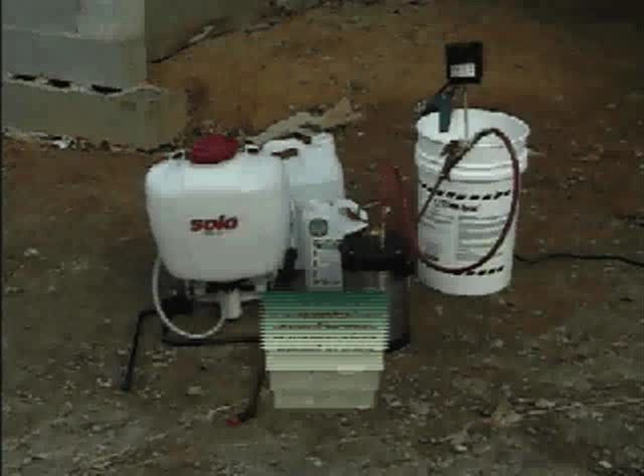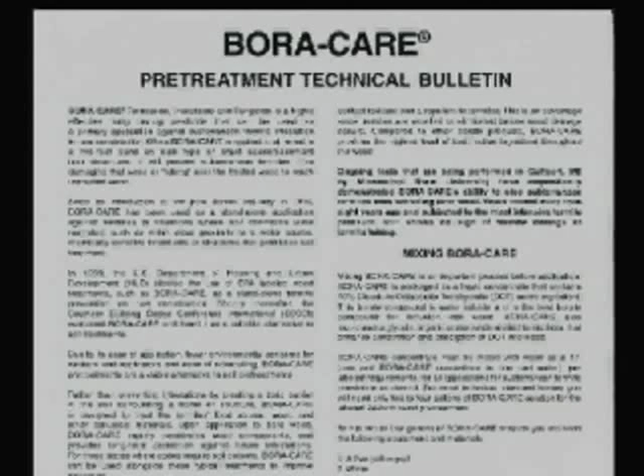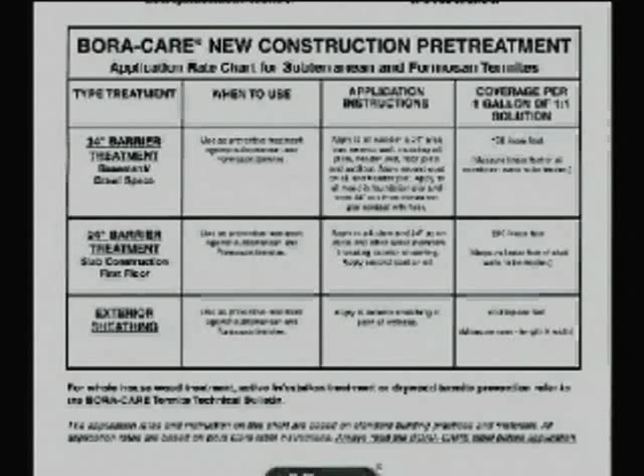To determine the amount of Bora Care needed to treat wood components in new construction treatments, check the chart found on the back page of the Bora Care Pre-Treat Bulletin. This handy chart gives a simple explanation of how much Bora Care is required for different application situations.

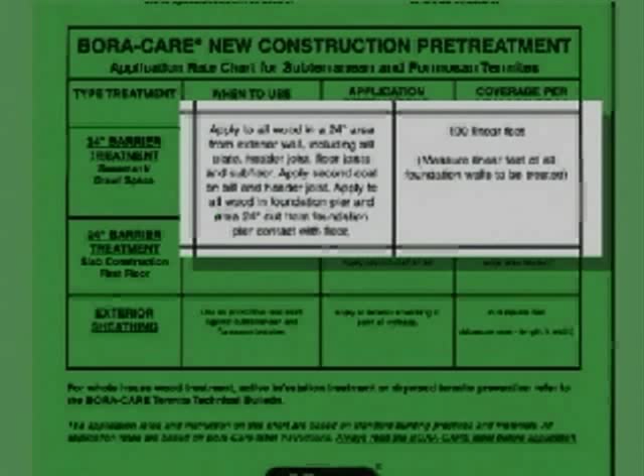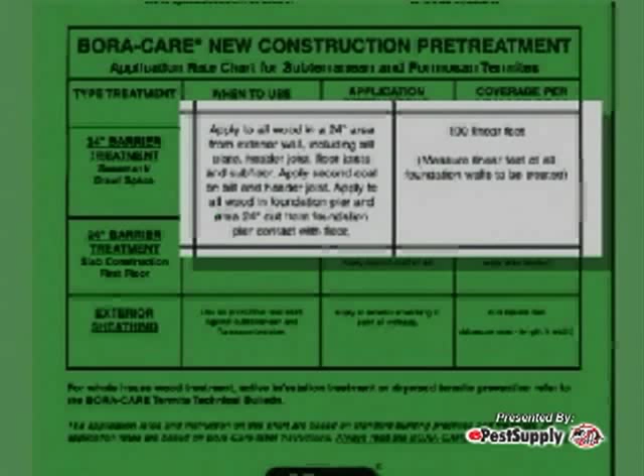For example, let's calculate the amount of Bora Care required to treat a 24-inch band treatment in a crawl space or basement home. From the chart, you will see that it requires 1 gallon of Bora Care solution to treat 100 linear feet. We will use this chart more extensively when we discuss specific treatments.

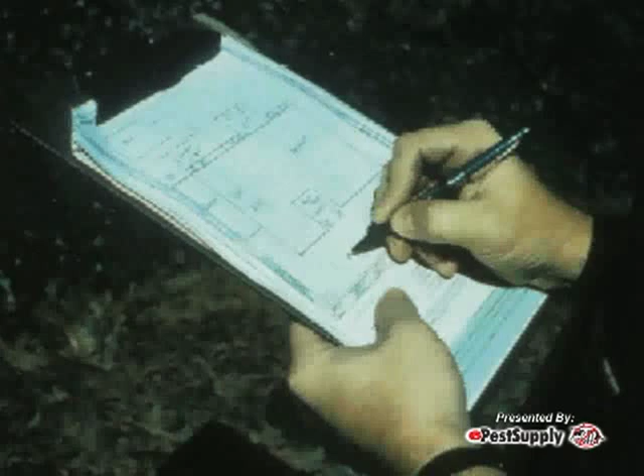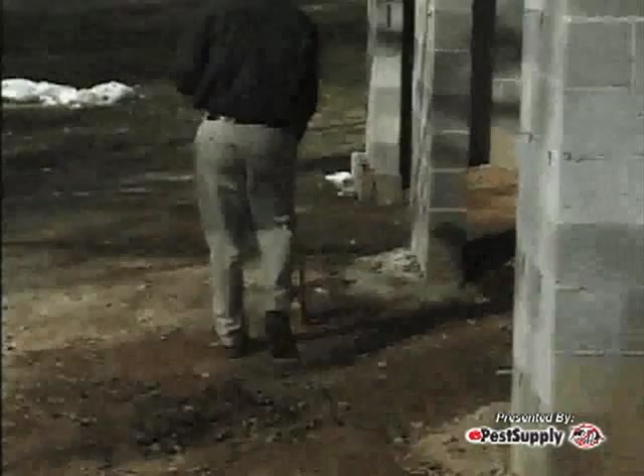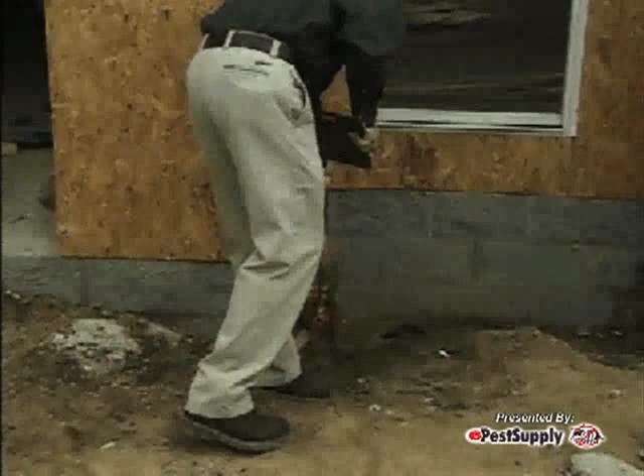After you know the structure is a slab or crawl space or basement, the next thing you must determine is the linear measurement of the structure. One accurate and fast method to accomplish this is to use a measuring wheel. This wheel can be used to measure the linear feet of outside foundations in all new structures and the linear feet of inside stud wall areas that are required to be treated in slab structures. We will talk more about measuring wheel use later in calculating specific applications on various foundation types.

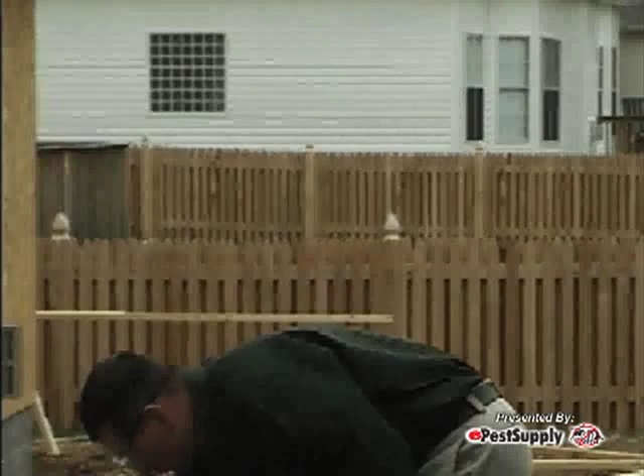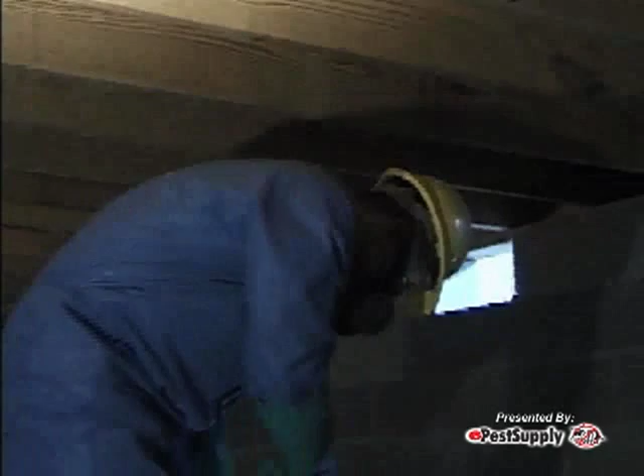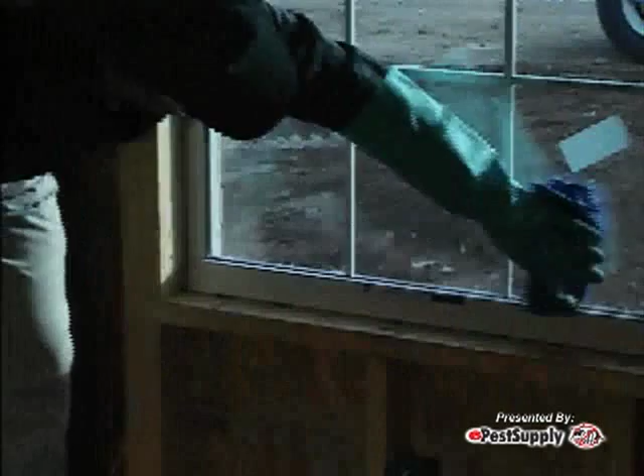Before beginning any chemical treatment, it is important to consider safety. According to the Bora Care label, the applicator must wear a long-sleeved shirt, long pants, socks, shoes, chemical-resistant gloves, and protective eyewear. When applying Bora Care in a confined area, it is recommended to wear an NIOSH-approved respirator when ventilation is not provided. Spills or overspray can be cleaned with a damp cloth or absorbed with appropriate materials.

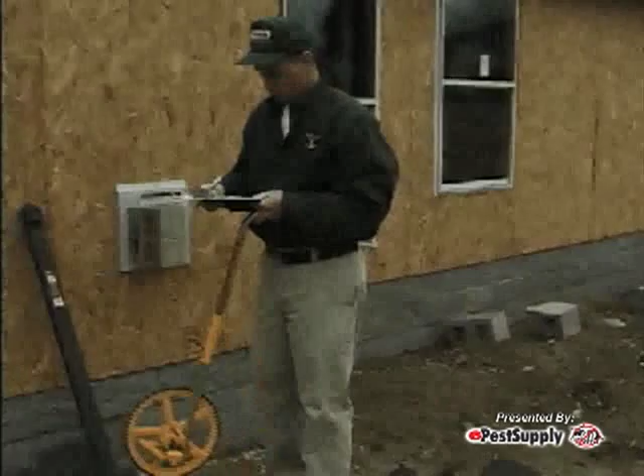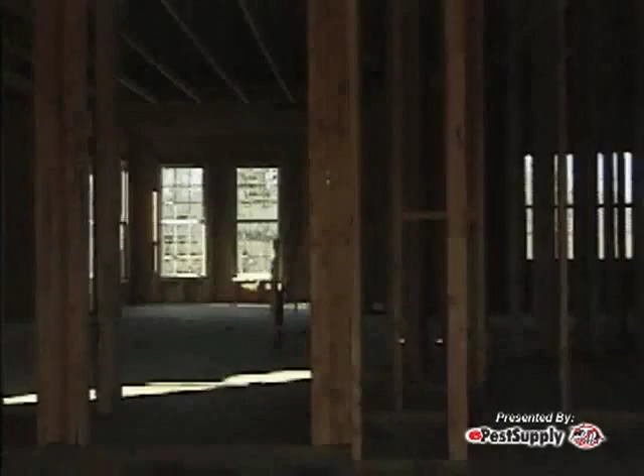Let's look at practical applications on new slab residential structures. The first step is to determine the amount of Bora Care needed. With a slab home, all wood components within 24 inches of the slab are treated. This includes the wall sill, wall studs, and exterior wood sheathing.

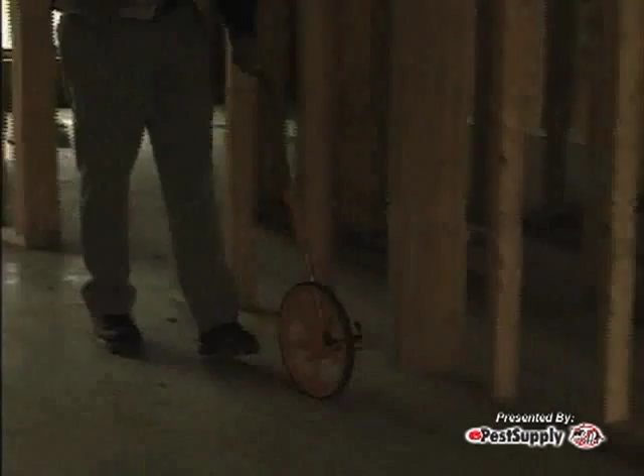First, measure the linear feet of stud walls and sill plates on the exterior walls and the interior walls of the structure. Once again, use the handy chart found on the back page of the Bora Care Pre-Treat Bulletin to figure the coverage for a slab home. The chart shows that when spraying to the point of wetness, 1 gallon of Bora Care solution will treat 200 linear feet at a 24-inch height on exterior and interior stud walls and sill plates.

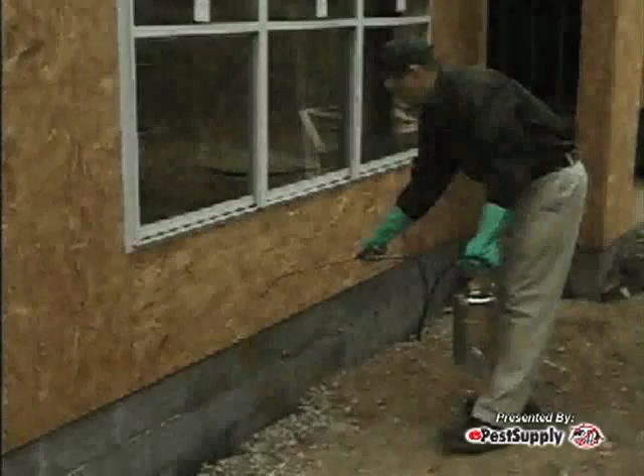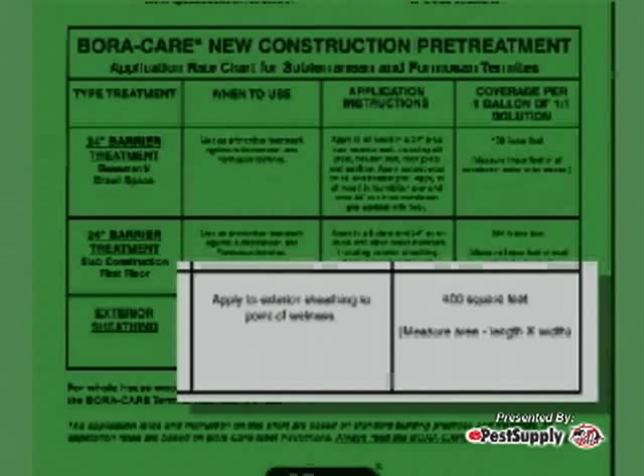If the home has exterior wood component sheathing, such as plywood or OSB board on the exterior, you will look at the chart area for exterior sheathing. To treat this area, spray to the point of wetness from the bottom of the sheathing up 24 inches on both sides. You will take the total linear footage of exterior sheathing and multiply by 2 feet or 24-inch treatment height to obtain the square footage of sheathing to be treated. This chart shows that 1 gallon of Bora Care will treat 400 square feet of exterior sheathing.

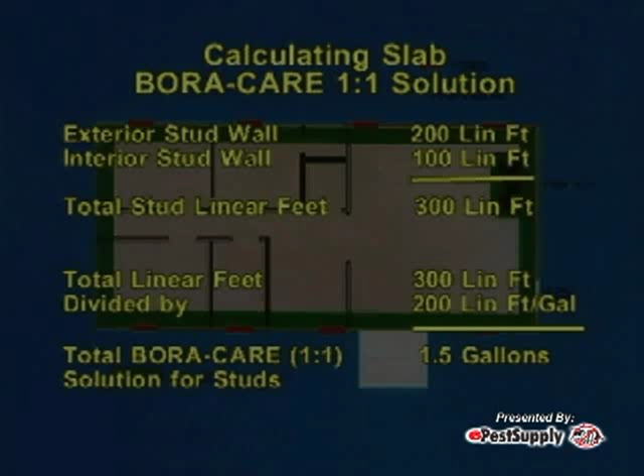For example, let's use a 2,500 square foot slab home. The linear footage on the exterior stud wall is 200 linear feet. The interior stud walls measure 100 linear feet. Using the application chart, you can determine the total Bora Care solution required to treat this area with a 24-inch high barrier is 300 divided by 200, or 1.5 gallons of solution.

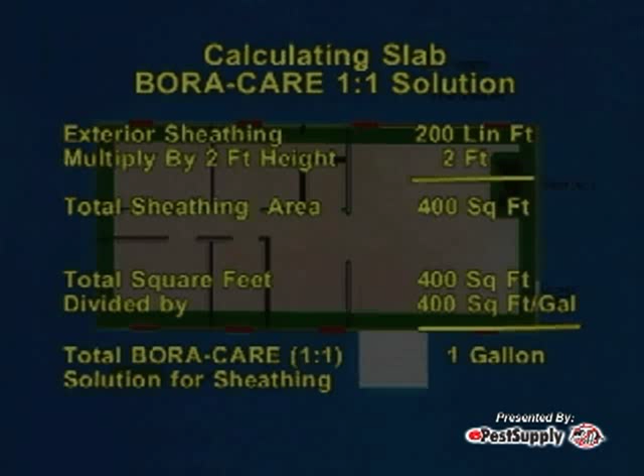This house also has exterior sheathing around the total exterior for a total of 400 square feet of treatment area, 200 linear feet times 2. The total Bora Care solution required to treat this area with a 24-inch high barrier is 400 divided by 400, or 1 gallon of solution.

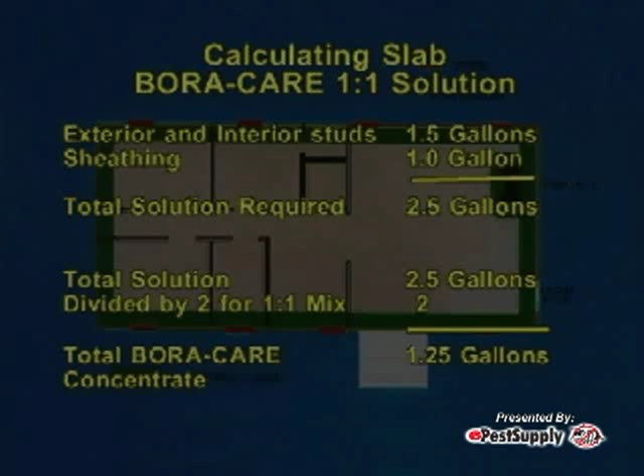The total Bora Care solution required to treat this structure is 1.5 gallons for the exterior and interior stud walls, plus 1 gallon for the sheathing. This equals a total of 2.5 gallons of solution. That means that you would start with 1.25 gallons of concentrate.

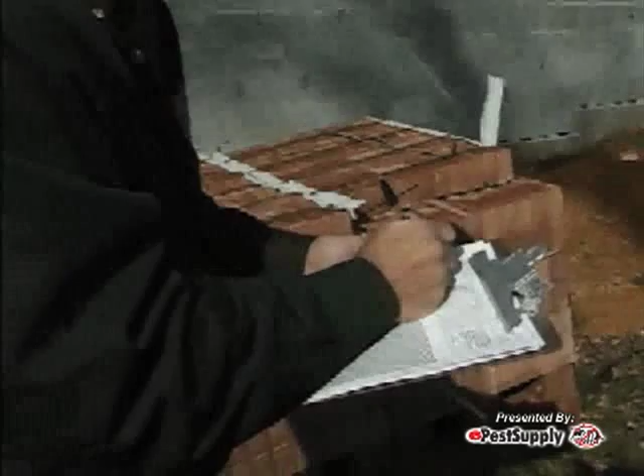Let's look at typical applications on new crawl space and basement construction. With this type of structure, you must spray to the point of wetness a 24-inch band of the wood components that come in contact with the foundation and support piers. Again, measuring is the first step in determining the amount of Bora Care that will need to be mixed. This is done by measuring all sill plate areas resting on foundation walls or support piers. This usually includes the sill plate, the band or header joist, and the subflooring 24 inches out from the foundation.

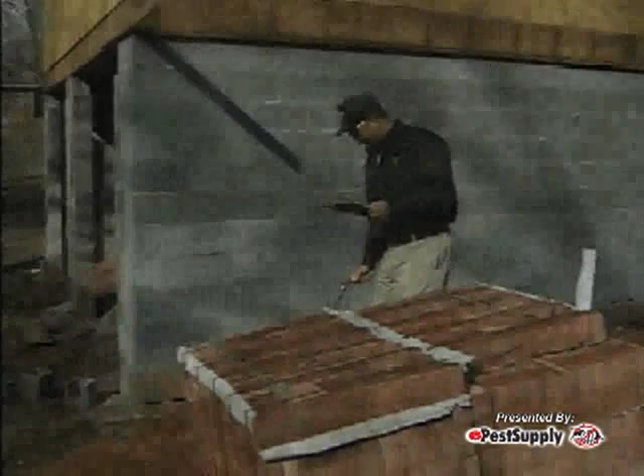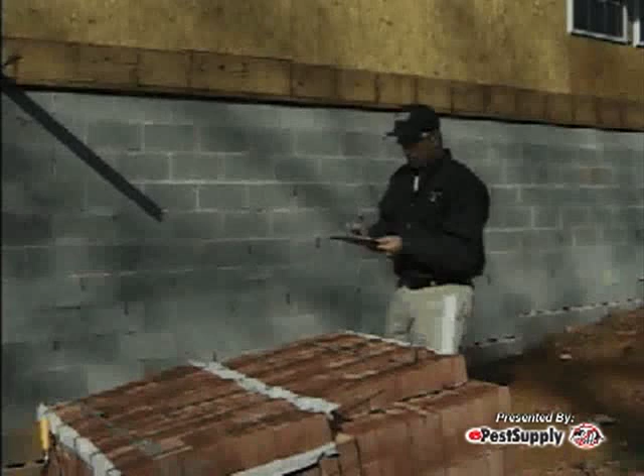If you can only treat one or two sides of a sill, header joist, or floor joist, you should apply a second application to that area, waiting at least 20 minutes between applications. Once you have the linear feet of these areas, you can determine the amount of Bora Care required by looking at the handy application chart under Basement and Crawlspace Construction. The chart shows that 1 gallon of Bora Care solution will treat 100 linear feet of 24-inch band that includes all the elements just mentioned.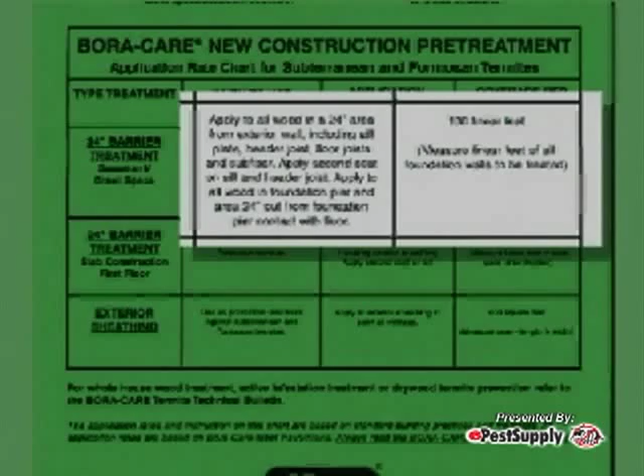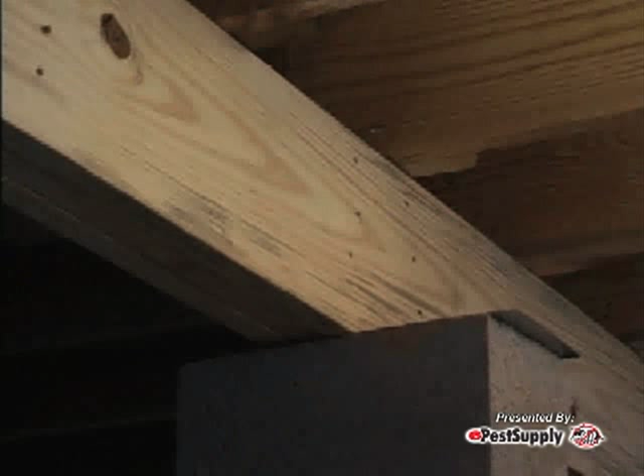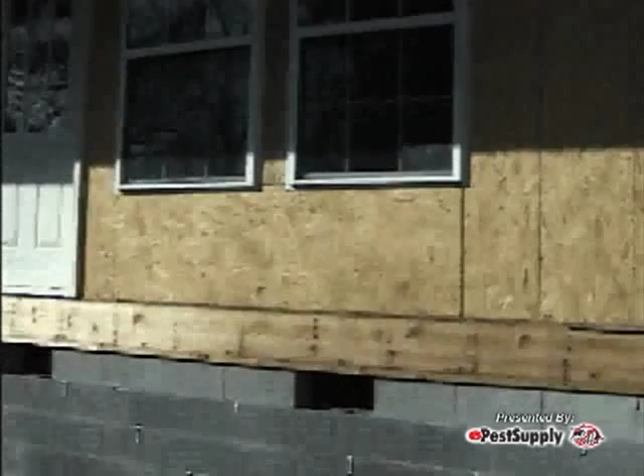To account for crawlspace piers, allow 8 linear feet of treatment area per pier. By the way, Bora Care is labeled for use on all wood composite materials such as composite I-beam floor joists. In finished basement areas, treat all wood attached to the foundation walls and treat interior stud walls as you would treat wood walls on concrete slabs. If exterior sheathing is present and accessible, treat 24 inches up from the exterior sill plate. Use the application chart directions for exterior sheathing applications.

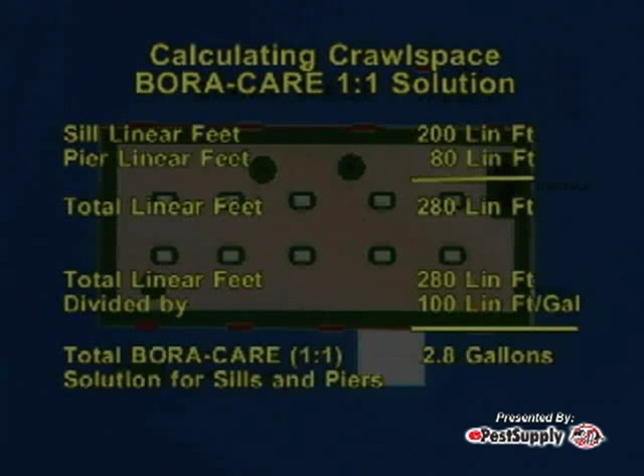Here is an example. You have a 2,500 square foot crawl space home with 10 foundation piers and exterior plywood sheathing. You have 200 linear feet of sill and you have 80 linear feet of treatment area for 10 piers. Since there is wood sheathing, also figure 400 square feet of treatment area. Obtain the total Bora Care solution required to treat the crawl space by first dividing 280 linear feet by 100. This gives you 2.8 gallons.

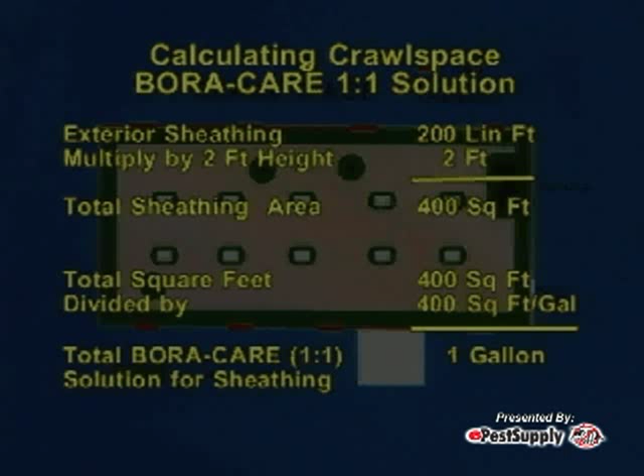Then figure what you need for the sheathing. Treating a 24-inch band of sheathing around the 200 linear feet that surrounds the house means you are treating 400 square feet of sheathing. 1 gallon of Bora Care solution will treat 400 square feet of sheathing. So the total amount of Bora Care solution needed to treat this structure is 3.8 gallons or 1.9 gallons of Bora Care concentrate.

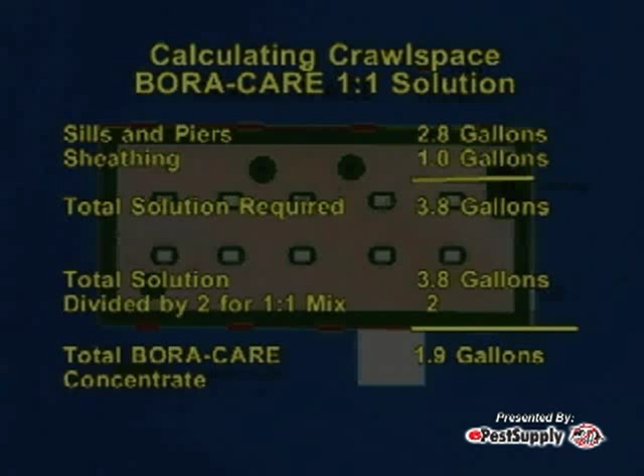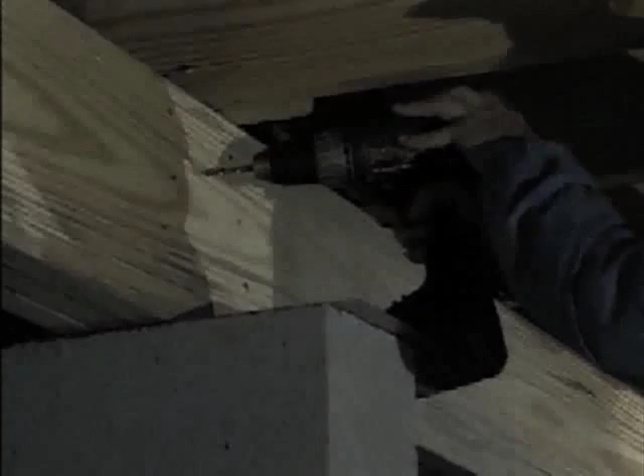There are some special application situations where other treatments may be needed. When boards are bonded together to form a wide beam or girder, they should be drilled and injected with Jecta at the point they come into contact with the foundation. Jecta is a concentrated borate gel designed to be injected into thick or sealed wood components.